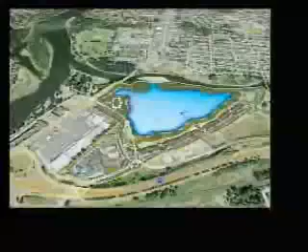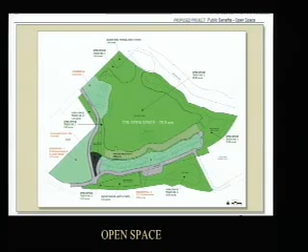So I think everyone is probably familiar with the location, so I'll go through that fairly quickly. The public and private benefits, we've talked about those, and this is just bringing it into the site plan. This is a good illustration of the range of things that are going on here.

From the entrance to the site down here, there'll be a waterfall and a water feature along this area. So your first introduction to the property will be very nice with the waterfall and water features. And then this area opens up, so you have a nice vista across. As you come down the entrance, this would be where the medical office building would be located.

Just a comment on the medical office, currently working with Kaiser on this site. This building is intended to move over to this location here, facing onto this part of Main Street. So what we're really proposing to do is, when you come into the project, it totally opens up the window. It's not just stacked with buildings on both sides so that you don't get a feel for the water.

When we have such an amazing resource, we like the opportunity to have a vista when you come into it, so that you actually have the opportunity to share that with not only the people who are living here, but people who are just coming to visit or hanging out. So then the density here is in the most appropriate spot to take maximum advantage of the view opportunity.

So this is where the 6 condominium buildings are proposed for this area, and then going on around, calling this at this point North Park, that would be an area where there'd be an amphitheater and gazebo, restrooms, and a ramp that goes down to a canoe and kayak storage area, and a water sports center building. So a lot of activity going on in that area.

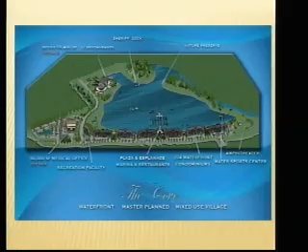If there was some unique venue going on, like a boat show or a ski show or something of that nature, there would be a special dispensation that would authorize the use of this area, but not over here. When Randy talked about signage, it'll actually be buoys that go across here that call it a no entrance area.

There's some lifestyle pictures that give examples of some of the things that might be going on there. The idea is to have it be a really fun, alive, interesting, exciting place for people to live and recreate.

If you go back one there, Randy, just for a quick view. This area here is an amphitheater that we built in Lake Oswego, and it was utilized not only for people sitting up in the bleachers, with this being the bandstand, but people would come up in boats and drop anchor and hang out and listen to the music, and then also come up the ramp and go to the restaurant. So it becomes a very public access, very public use area.

And might also mention, knowing people are increasingly concerned about finances, the programs were all paid for by a lady who worked for the city as an events chair, and she would go out and solicit money from businesses for the various bands and things. That was so popular that the city actually built another larger facility.

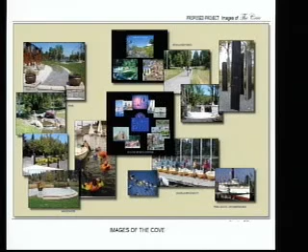It'd be really fun for kids to have little sailing classes and rowing classes, and learn about boating safety.

In terms of site challenges, the biggest challenge is the fact that we're in the flood zone, and most of the site was underwater in the 96 flood. But that doesn't mean it's not developable. With the proper engineering, we can bring the building pads up above the flood elevation and have depressions that create a balance between cuts and fills, and that's what we've done.

We spent a lot of time with our engineers figuring out how that works. Every time we change a plan or make some fine-tuning, it's back to the drawing boards, and the engineers get to do their calcs and recalcs in terms of the cut and fill part of it.

The other side of that was not just us making changes as we moved through the process, but the public input. We've had a total of 18 meetings in the last 3 years, so it's had a lot of public support, input, and comments. Where we've had issues that were negative, we've actually modified them, such as the original plan that had floating homes. So it's been a long process, but a good one, and one that we actually enjoy doing.

Some of the other site challenges are that portions of the site do not have structurally sound soils, or have too much construction junk in them, and need to be either worked into a berm somewhere on site or exported off the site.

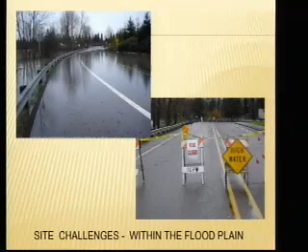Thank you. I think this was November a couple years ago when Main Street was closed due to high water. Again, this is something we have to plan for. Our relocated Agnes Street will be above the 100-year flood elevation, so people can still get in and out even in the event of a flood. This road is actually being raised at the Agnes Main Street entrance also, so it gets up above the 100-year flood.

This is an illustration of how vertical the banks are around the edge of the cove and how thin the ribbon of vegetation is. When you get up to the top of the bank, there's not much vegetation. It's almost all along the edge and not a very good habitat.

I don't know if you can actually see this drawing right now, but this shows the vertical nature as it exists. When you cut that material out, which is the orange material here, this is the bank as it exists now, with trees and other materials. Some of those will come out, and then that material rolls back and goes up to create the fill area back up here. Then we will vegetate from there to there, versus just this little area.

So this becomes a 3-to-1 slope. The dirt comes out, is used for fill, and then it becomes totally revegetated with natural materials and none of the invasive materials. So it all becomes standard materials appropriate for that property.

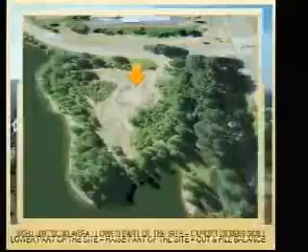This slide shows where cuts and fills will occur. The arrows pointing upward indicate areas of fill, and the areas pointing downward are areas where the site is being cut.

This is the North Park area, and part of the reason to cut there is not only to get the materials, but to create a bowl for the amphitheater area.

This area here, you can see how thin that ribbon of vegetation is along there. These are where the condominium buildings will be located, and the site section shows the area being cut and then filled back up here.

The medical office building would be back here, and the other office building with the two restaurants in that location also needs to be cut to obtain material to fill in these other areas.

So what's happening effectively, we're borrowing here, rolling those materials here and over here, creating a lower spot that in fact was within the floodplain, but now we take enough material out so that you can bring this up to where it is not in the floodplain.

So you're taking materials from one place, pushing them into another, so that you create usable spots within the site. We're not building within the floodplain, we're building above it ultimately.

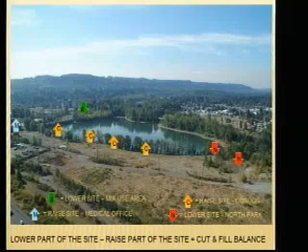Finished floor elevations will be a couple feet above the 100-year flood. Actually, the 100-year flood for the city is about 4 feet higher than FEMA's 100-year flood, so there's even an extra margin of protection there.

And this shows a cut area. This is the Oregon City Shopping Center over here, Main Street, and then it's got a little peninsula here that will be cut. Unfortunately, this was an area where there is a lot of garbage and debris that probably will have to be exported.

And here, looking from what will be the North Park area, looking down along the edge of the cove. This is the peninsula that will be all preserved.

And once again, you notice what a thin ribbon of vegetation is along here, quite a bit more on the peninsula. And there is a little pathway down here.

The idea would be to just have a bark pathway down there and some interpretive signs, and have Parks and Recreation take a look at it once in a while. If there's too much usage, then something will be done to reduce it so that it can really be an area for wildlife more than for people.

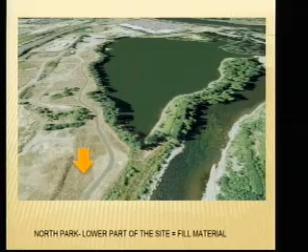This was the site of the glacier operation before it was shut down. And this would be the site of Kaiser. It would be located approximately in this location.

What we'll be doing is bringing in a crushing machine. There's a lot of concrete existing on the site in this area. Back over here, there's retaining for this little area. There's excess concrete back here.

So a crusher will come in and we'll utilize that material. We'll recycle it into the roads and into the base. And we've done that on several projects in the past.

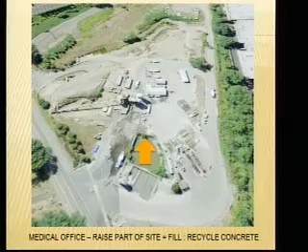This illustrates the areas where there's going to be cut or fill required, and again, it's a complicated calculation of volume to figure out how to get it to work and balance.

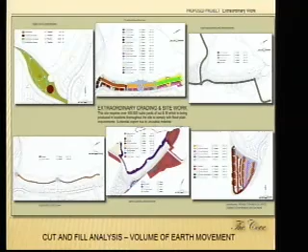When you look at the amount of volume, it's about 250,000 of cut and 250,000 of fill. So you're talking moving 500,000 yards at about 12 cubic yards per truck. That's about 43,000 trucks of dirt. So it's not an insignificant amount of movement.

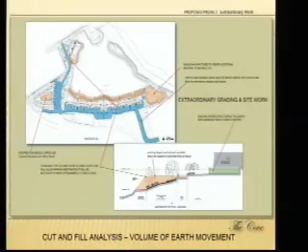That primary movement will all be done in Phase 1 and Phase 2.

And this is an overall site plan from the landscape architect's purview. The extent of vegetation is nicely shown here - the edge of the condominium buildings, landscaping, down to the esplanade, and then into the area of riparian restoration.

The water management that was mentioned early on will be along these roads where there'll be swales. It's a section which we have submitted to the city for approval so that the water will actually run off and be carried into these swales, and it'll be bio-filtered, which is very positive.

And then where water is coming off the roofs, part of it will come this way, and part of it will go into several filters that will distribute it all across the edge into this area, so it'll actually biofilter also.

While we're here, there's been some questions about water quality, and there's been testing done, and there hasn't been any negative results back. Interestingly, because of the tidal shift 4 times a day, the water is exchanged

about once every 7 days. The other thing that's interesting is that this, obviously, was a sand and gravel extraction, so there's sand and gravel under this peninsula as well. Depending upon the height of the river and the height of the water here, that water actually sometimes percolates underneath, so that helps restore fresh water into the area as well.

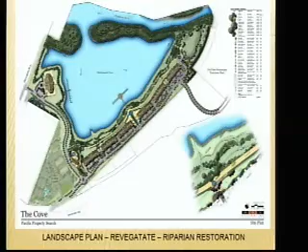When Ed said we've done this before, this was the old Oregon-Portland cement factory on the Willamette River in Lake Oswego. It was at one time the largest employer in Lake Oswego, but it was also a noisy, polluting industrial use, and people that lived here in Old Town were tired of getting cement dust on their cars all the time. This is like 50 acres.

To give you a sense of height, this was 232 feet high. We got bids from probably 5 companies across the country—there's several of them that do nothing but take down cement plants. We ended up having them come in and dynamite this thing, and it blew over so that it fell. When it fell, it knocked the other ones over. It was an amazing display of explosives.

But then we brought in a monstrous, almost 2-story crusher, crushed all this concrete, and used it for road base. We were able to pull out $500,000 worth of steel that we recycled. So it was a real effort, and this was done 20 years ago. We've been doing this a long time, recycling and doing things which are now pretty important to us all.

And we had environmental issues to deal with here. There was a bunch of asbestos that had to be carefully wrapped and exported from the site, and there was some chromium that was down here.

The city gave us this property as part of a contribution for moving forward, and we built an office building down here and put a restaurant in this area, but this was all city property that was sitting there. It was a prior treatment plant, so we cleaned that up and converted it into a use for offices and a restaurant.

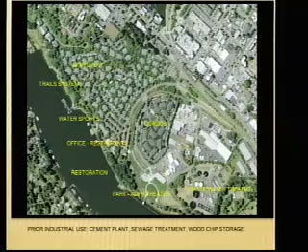One other thing worth noting about Oswego Point is that the property taxes, the real estate taxes here, paid for the bonds that initiated the redevelopment activities in downtown Lake Oswego. So in that case, the tax increment financing worked exactly as it's supposed to. When we started that project, the shopping center next door came in and completely remodeled, so that was a very positive thing for the downtown area also.

This is a project in Vancouver on the north side of the Columbia River called Tidewater Cove that we developed a few years back, and it too has a number of similarities. This is a wastewater treatment plant here.

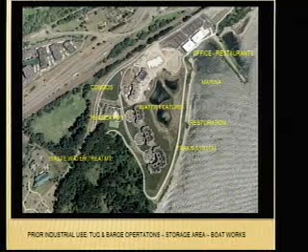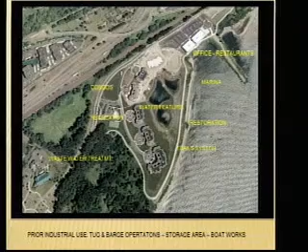This is a pathway, in this case a concrete pathway 12 feet wide. We revegetated all of the bank along this area, and lots of times we do things we're not really required to do, like we built some new wetlands and ponds in this area, not because we had to, but because we thought it was a good idea from a marketing standpoint. People who are in the buildings further away from the river get an increased sense of connection by being in close proximity to water in the newly created wetlands.

There's another shot of the same project. 7 buildings here, 3 down here, office buildings, and a restaurant. This is laid out with 94 future marina slips. If you go over there on a weekend on a nice day, it's just crowded, people going up and down, all the way to the bridge.

So it's a real opportunity. I think it's what we do in almost all of our projects, especially where we have water projects. We don't try to lock the public out. We bring the public to the project. In this case, it's been a very positive addition, so it's worked out very well.

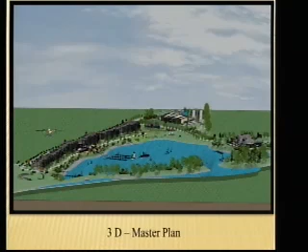And sort of a bird's eye view looking at the project. Starting a little tour down, this is the area where there'll be the waterfall and the water feature. This is the general office building with restaurants on either side, looking out over the water.

And some ideas of what a waterside dining experience can be like. This is a restaurant that was associated with Oswego Point on an existing structure that was out on the river.

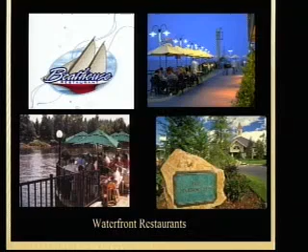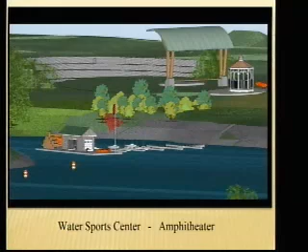Now this is from the North Park looking south along the Esplanade. The Water Sports Center is right there. And you can see this would be the amphitheater and the stage area, a little gazebo, and some restrooms there as well.

And just some ideas of the Water Sports Center that's in Lake Oswego currently has 3 high schools that have a rowing program there, so that cranked up.

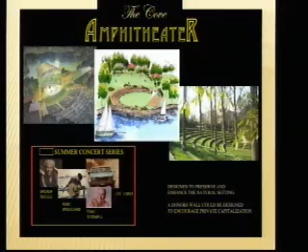And when we did that, we actually did that with the city. The city had $950,000 that they were going to utilize to build that. We said, give it to us, we will build it for half that price and not go out to bid, not make it a public process. We used it almost like where you would oversize a sewer system. So they were able to give us $450,000. We built it for the city and then gave it back to them. So it worked out very well.

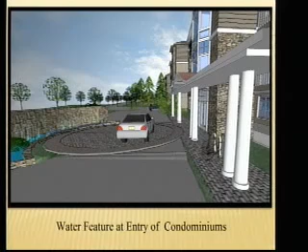Lots of times the thing people don't like about new development is they feel it lacks character. So what we try to do is figure out what design elements really reflect character and how we can build them into our projects.

This is the entry to the condominium building. You can see the little eyebrow thing there.

This is a water feature here that's designed in part to create a pleasant sound and to some extent to mask the freeway noise from 205. We've built exactly this kind of product next to freeways before, and we triple pane the windows. It's nice to create a water feature so that when you come up, it creates that sound. But the living side, which is really looking out to the water, will actually be all protected with the right kind of design in the finished materials.

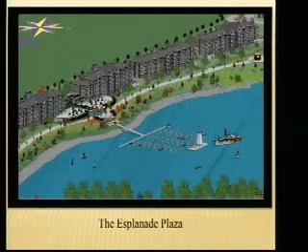So this is the esplanade going all the way in front of the condominiums, and at the midpoint, a plaza. I think we'll zoom in on that a little bit.

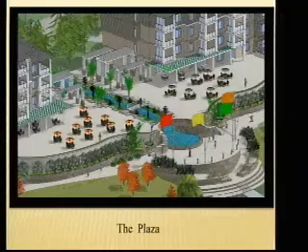Another water feature between the two condominium buildings, and the potential for a restaurant on this side and also in this area. This has the potential to become a very exciting area, kind of the heartbeat of the community.

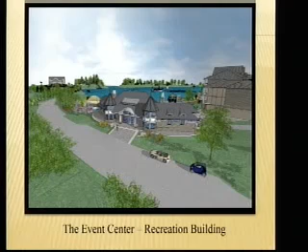This would be the recreation building or clubhouse, and you can see we're once again repeating the design elements, in this case the eyebrows, and this would be a very attractive building. It'll be more than just a rec building, it'll have an area for doing physical things, working out, what have you, but it'll also have a nice lounge area so there'll be an opportunity for community use.

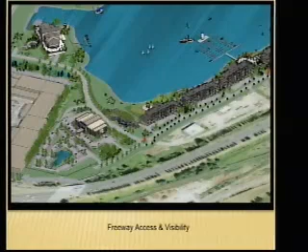Looking at the combination, the current plan slides down here to some extent, with the clubhouse building, the condominiums going down this way, and the plaza area in the middle of the esplanade providing access to the marina. Then the other office building with restaurants on either side, where people on boats can come do a temporary tie-up while they enjoy brunch, lunch, or dinner. The idea is lots of activity, lots of fun, exciting things going on.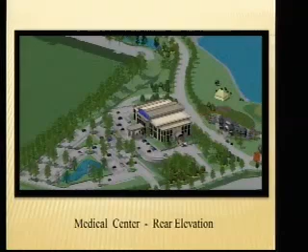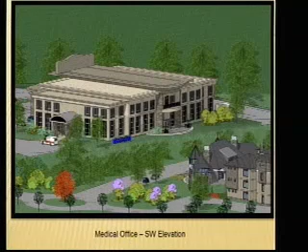Another shot of the medical office building, different angles and views, with them doing a different design and pushing it over this way, as I mentioned, so we'll be able to drive down here without this building imposing onto the view corridors.

Want me to go through this, Randy? This is Phase 1 and Phase 2 of the infrastructure. The green is Phase 1, the yellow is Phase 2. The intent is to do these as one construction schedule.

This is where we're borrowing materials, here and here. We're filling here, cutting back the bank and rolling that back for fill here, and then putting in the road, putting in half of this road.

So in terms of completion, regarding the city's investment, we will be rolling the dollars coming out of this sale into the project. A lot of times as a builder-developer, when you build a large project, you pick up profits progressively as you move through. In this particular case, we're taking all of the funds coming out of this sale to Kaiser and rolling it right back into the rest of the production.

So we're making a very major contribution, way over and above what we have done already in terms of pre-development costs, 3 years of commitment, and probably $3.5 million.

So in this area, once Phase 1 and Phase 2 are done, you'll have these pads rolled out and hydroseeded. We'll have part of this road completed, the north part fully completed, the esplanade done, and all of this planted.

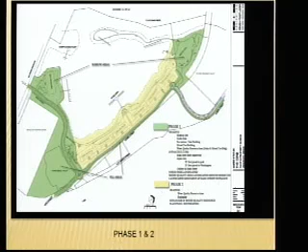This would be an entry statement that starts right at the entry coming underneath McLaughlin. We'd have a little water feature there, and it would trickle on down.

Phase 3 is going vertical with the medical office. We are not the builders of that; Kaiser will be building that independently. They've told us they will be building roughly 80,000 square feet, and they'll come in for a separate request for approvals with that design.

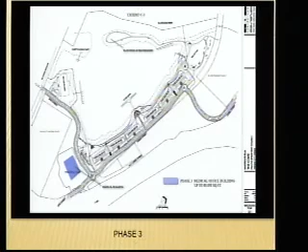This is showing what's going on in Phase 1, 2, and 3. This is all being graded out, this is all being finished, this is being finished. The building would be going vertical, and this area would be a borrow area.

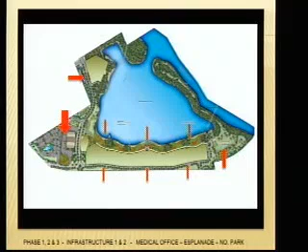We've done additional investigation, and this material is so bad that it needs to actually be exported. So we won't be able to use it so much as a borrow area, but rather to create that depression, so that when we bring new and good materials into this area, we'll have enough water resources there to do the trade-off for the cut and fill balance.

So what you see in terms of a 3D look: this building vertical, no building here, all the road system in, all of the planting, the Esplanade, and the North Park.

North Park, once again, and this will work closely with the city on how they want to lay this out. We've done a design. We've had some people suggest that if the people are sitting here, the sun's setting over there—do you want that? We might have to twist this around a little bit to create the window for the sun.

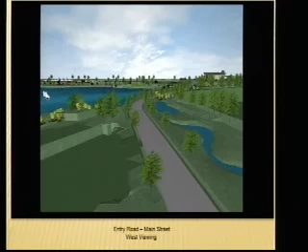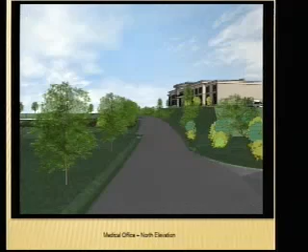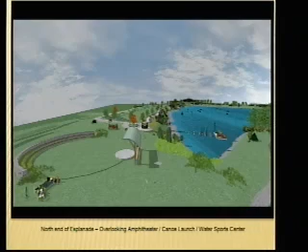This is looking at that end, looking down the Esplanade, tracking on down to the other end. This is coming in at the water feature area. The little waterfall would be right here at the front, going past the mixed-use building that's not completed yet, going up to the Kaiser, and that building will be slid back, going right on up to the road to the turnaround, and going down Agnes this way, getting to the other end, which is the North Park and the trail that goes along.

Now, this is a very wide trail. We've had some comments asking why it's so wide. When you get down to this area, you could actually have an antique show, a farmer's market, a boat show, you could have boats parked along here. There's access to utilize this for vehicles, for special uses, for special venues.

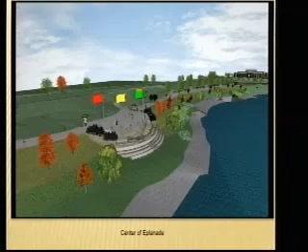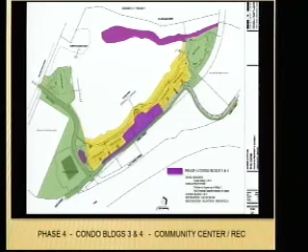Then we're going to Phase 4, which is the first opportunity to go vertical with condominium buildings. There are 2 buildings on this location, and the reason for doing the center versus progressively moving up the road is to put this plaza in and create that excitement, that kind of little jewel part of the project. Critical mass. So with that going in, you'll have these still graded out.

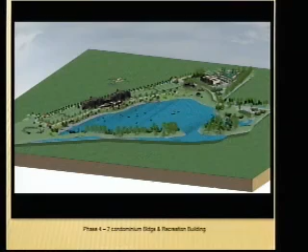You'll have these 2 buildings vertical, 80 units. If for whatever reason the market's a little softer when we'd like to start this—which would be crank up design elements, finish the working drawings at the end of this year—the lender could potentially say, well, we want you to just build 1 building. So the Phase 4 could potentially get broken into 2 at that very first outset. Our desire is to build them at the same time, and we get more efficiencies and economies doing that, so the intent would be to do the 2 buildings.

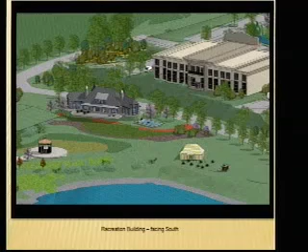And the recreation building will be used for marketing at the outset of the project, so that when people come into the project, they can park out here in front. They'll have a view corridor that looks straight out. We'll have topo tables, we'll have all the standard marketing. We always do our in-house marketing—we do not ship that out to third parties. We like to control it very closely. We create all the media for that, and we actually hire people that work on our staff.

This is going to the next building, which is Building 1 and 2. This is Building 3 and 4, which is built. We're building these 2 buildings in the 5th phase—that's a total of 72 units, so it's this product here.

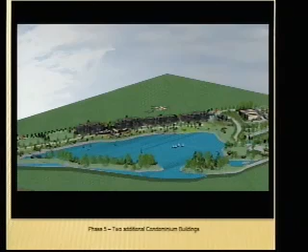So what you get visually are finished pads, so you don't have an unfinished look. This will actually be growing, well maintained. The whole Esplanade will be well maintained. You'll have these 4 buildings. Then going to the next phase, the additional 2 buildings, another 72 units, which will be in the 6th phase. So that gets you a completed product here.

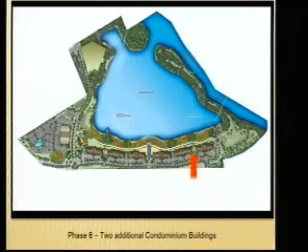The last thing remaining will be the mixed-use building, which is Phase 7. This is an overview of those completed. So then we come back in with this building.

Now, it says Phase 7—our intent is to actually go out to market with that probably within the next 3 months. We might bring somebody to the table; we're not building this product ourselves. We've got a preliminary design, and we would like to bring somebody and have them take that design, or a design which we would work with them on.

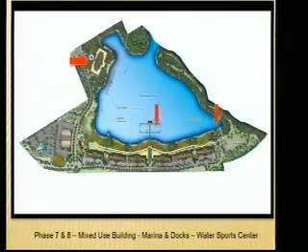The same thing that we've got in our contract with Kaiser—whenever we've done mixed-use projects, we mandate that certain elements and materials have to go into their exterior design. We want compatibility, that feel that it's a very cohesive project. We don't want something coming out of the ground that is totally different from the rest of the project. So we have the opportunity to review design here, and we'd do the same thing to make it a very compatible project.

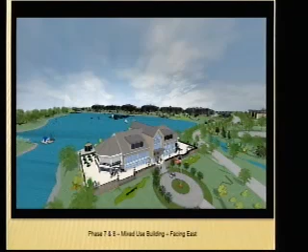So this is 7 and 8, the mixed-use building going in. The marina—we won't just go out and build a marina. We will actually put it out for people that would like to have a slip, and we would build those out progressively. It's not a profit center for us; it's more of an amenity just for the public and for those people in the condominiums, and anybody that's in an office building also.